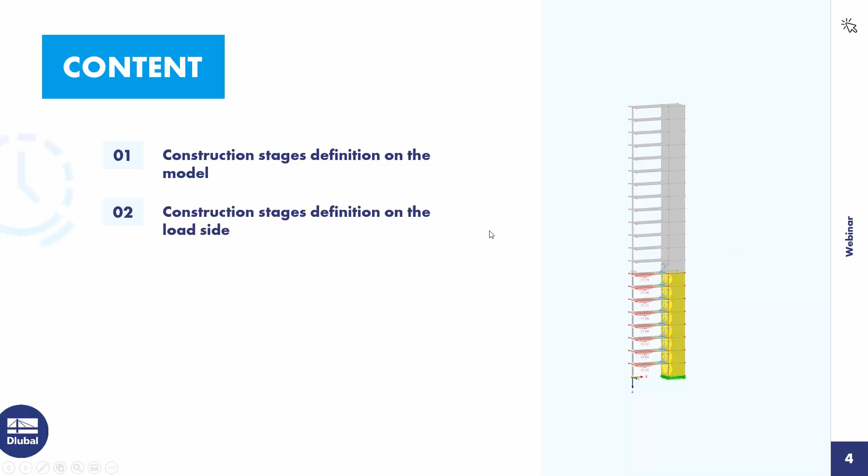You can email questions to info@dlubal.com. For today's agenda: first Adrian will define the construction stages on the model, then in the second step on the load side, the third point of the webinar is design based on construction stages, and the fourth point is review of results and documentation.

After the presentation, he will also introduce some new features in the add-on.

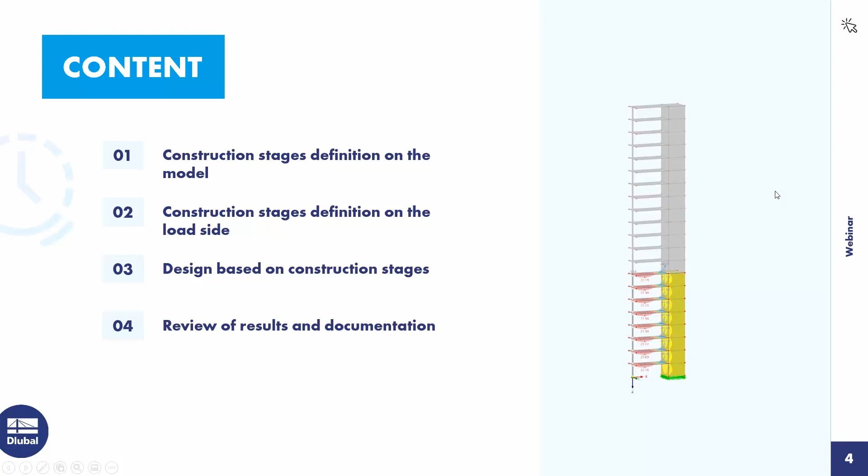Then let's go, Adrian. So you should see my screen now. First of all, a short introduction of the main example I want to show today.

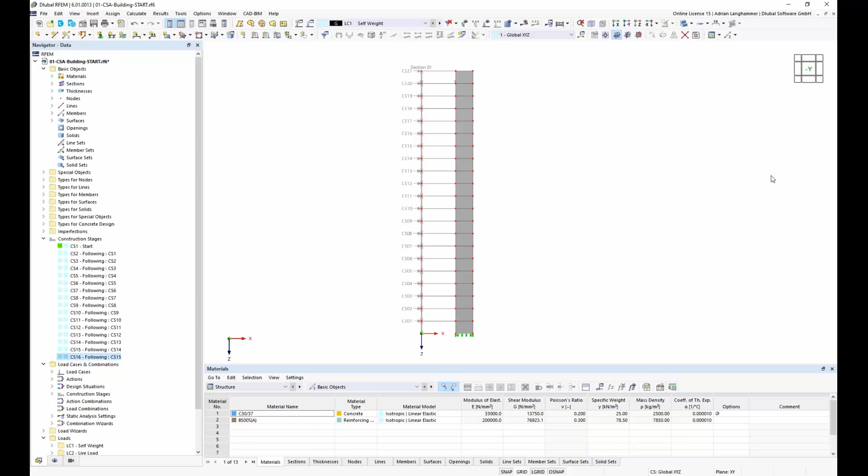This example is based on a literature example from the German book Finite Elemente in der Baustatikpraxis by Rustler and Barth, which is in turn also based on another example from Bischoff and Plätzinger. I did not use the whole structure of the literature example, only a substructure to show the effects regarding construction stages.

The structure, as you see, is already modeled. A short description of the structure: there is a shear core with concrete walls with a thickness of 40 centimeters, and there are also slabs.

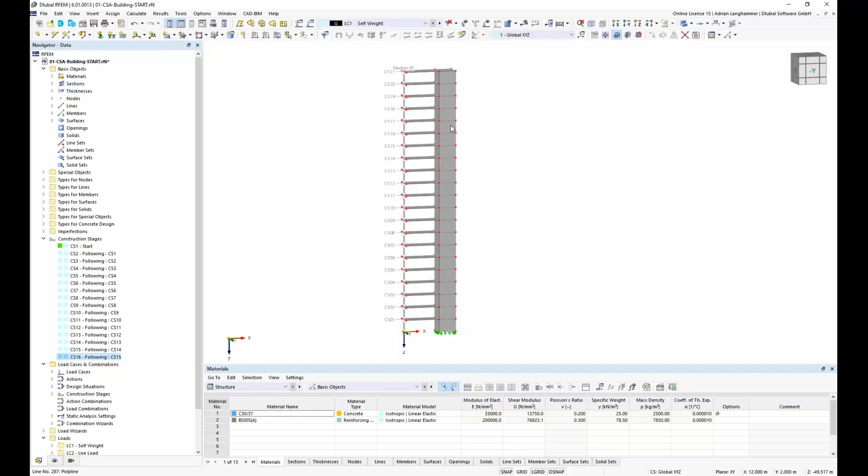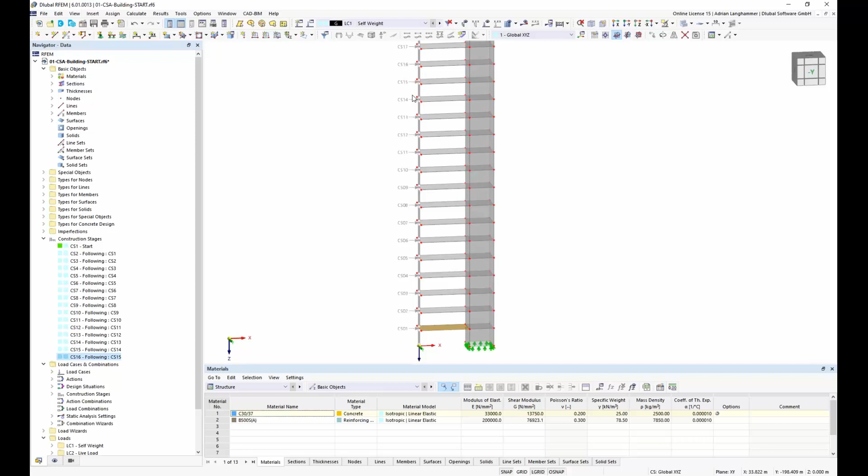Here I can show this as well. There are slabs with a thickness of 20 centimeters, and there are quite slender columns here with a square cross section 20 centimeters aside. First, before I start with the construction stages, I will calculate the internal forces and the deflection of the whole structure.

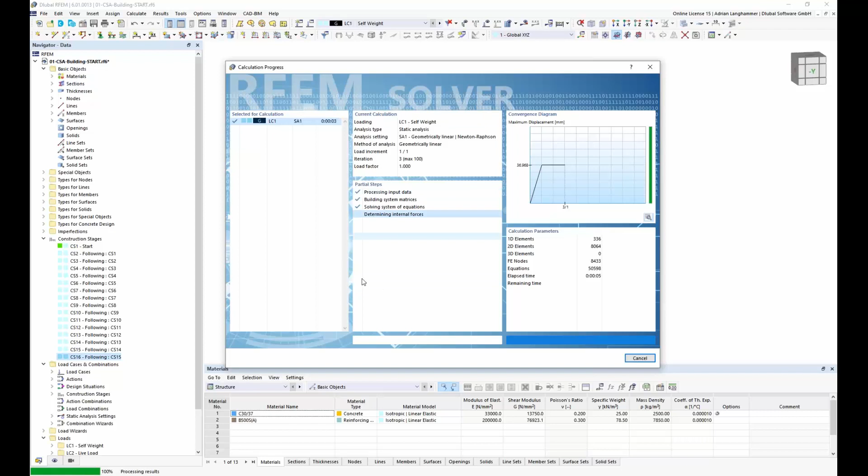I will calculate with self-weight without considering the construction stages, to show what the topic is in this example, what the problem is in this example.

If we take a look at the deflections, we see that the slabs here hang on the inner core. And if we take a look at the internal forces, bending moments in the surface, we see—I have here a section in the middle—

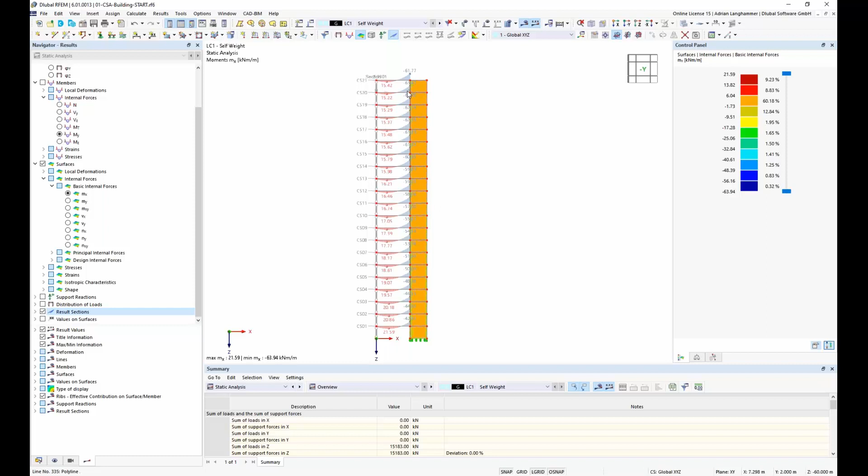As we get higher, the moment about the support is increasing and the moment in the field is decreasing. This effect appears due to the different stiffness distribution in the structure and due to the effect that the slabs hang on the core.

And in reality, you do not build the whole structure in one step. You build it in single stories, and the weight is applied not in one moment but step by step. To consider this, we can use the construction stages, and of course avoid such topics like we see here, that the moments are maybe not correct in the highest story.

So I will show the input for the construction stages. First of all, you will find the construction stages add-on here in the base data, where you find all the other add-ons.

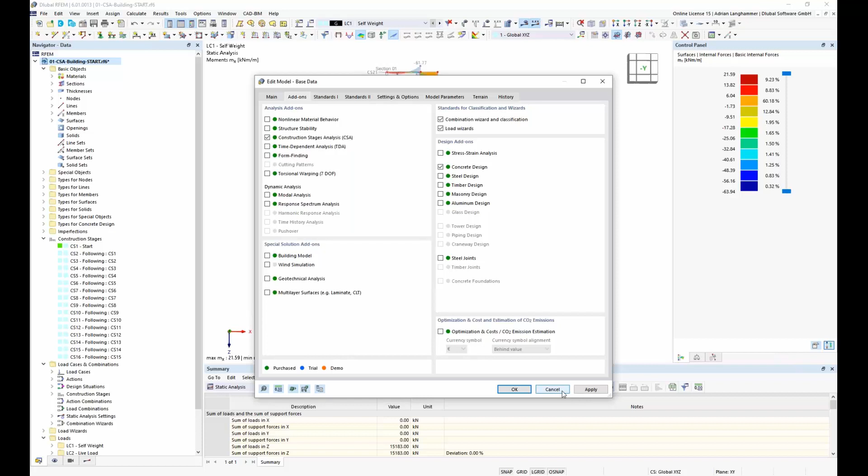Here on the left side, construction stages analysis, or short CSA, and I already activated the add-on. The input is done here in the navigator in two parts. There is one part on the structure side to define the stages on the structure side, and the other part is definition of the stages on the load side. So we will start with the construction side.

I already defined some stages. If there's no stage defined, you can start here with right-click New Construction Stage. I defined them already because the input for the stories is quite similar for the whole structure, so I don't want to waste time. Therefore I defined already some of the stages.

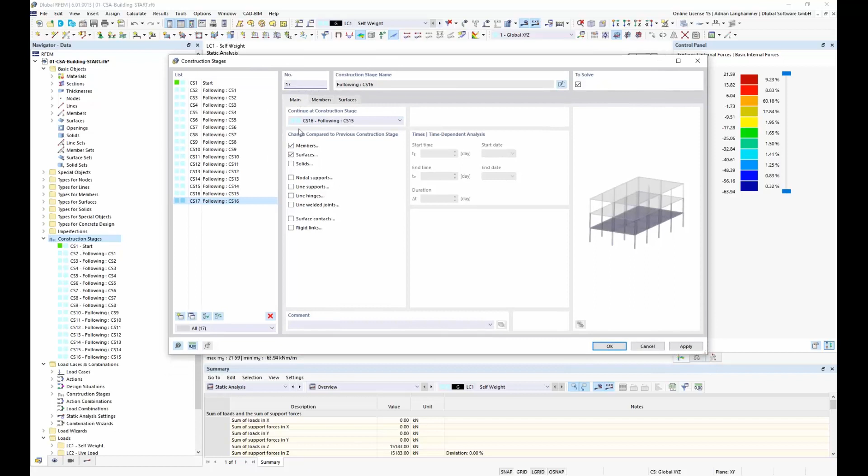For the input of the construction stages, you have here in the first register the parts or the structural elements which could be used in the construction stages. If you want to use one of the structural elements like members or surfaces, you have to check here, and then you will get an additional register where you have to do the input, or where you have to choose the members or surfaces which should be activated in the particular stage.

There's another part here on the right side, an input regarding the time-dependent analysis. This is another add-on which is at the moment not ready, it is still under development. In the future, there will be the possibility to consider also the time-dependent analysis together with the construction stages. But as I said, it is at the moment still under development.

I guess when it is ready, we will have an additional webinar regarding this topic, so we will show then especially the time-dependent analysis. Today, there's only the calculation of the internal forces considering the construction stages.

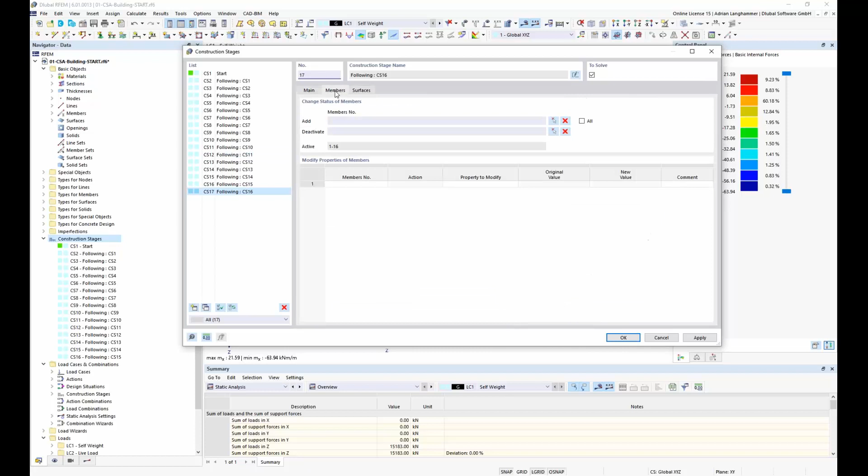After I've checked here the members and the surfaces for this construction stages, I have to choose which member, first which member and then which surface should be applied in the stage. So I will start with the member. As I said, I already did some input. Where if there is once a column or a member selected in the stages before, I could not select it again. You see this. So I will choose the following members and surfaces.

Maybe I can turn off the results from the linear, from the load case 1. I have to select the surfaces. In the whole construction stages there are 21. I can now define the following stages till the end and go through the input.

It remembers the input from the stage before, so here it is activated again, members and surfaces, and I will add the last columns here. I can add it by picking them, or I can also add here the columns numerically. They have here in this example the same number as the construction stage, so I know the number of the columns.

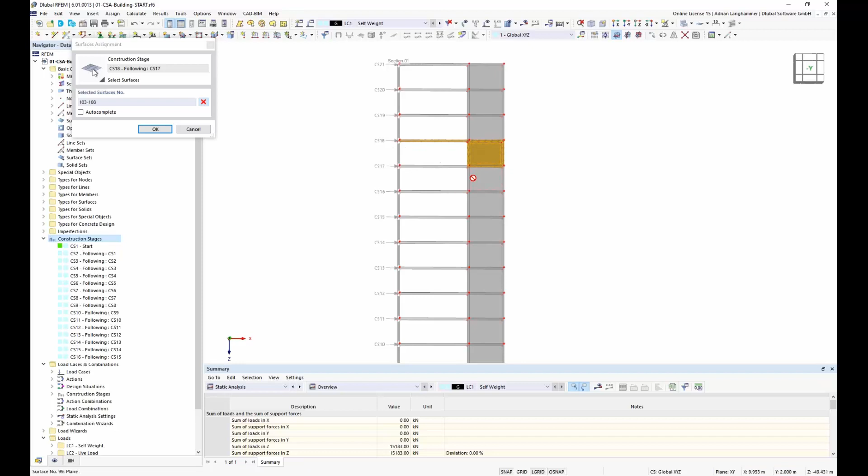For the surfaces, I have to do also the input. It's the same like for the columns, if I select surfaces, it can only apply the surfaces which are not used in the stages before. And I will here finish with the input.

I made some short comments here so that I know in which construction stage the elements should be used. And then I'm ready with the definition.

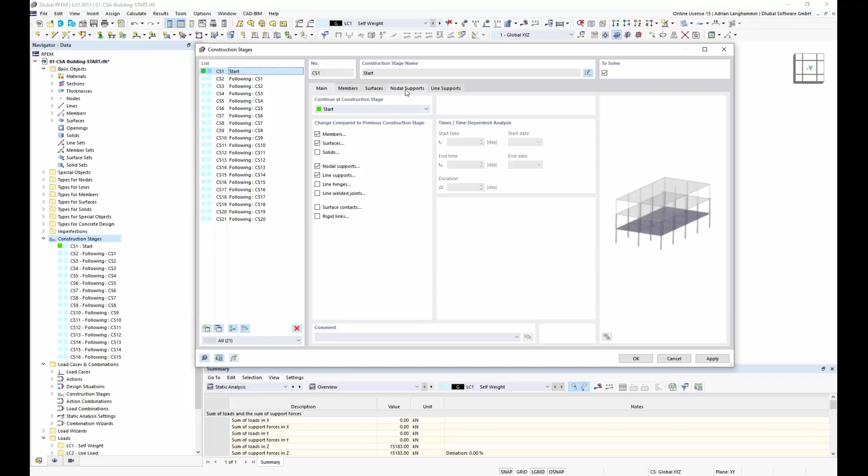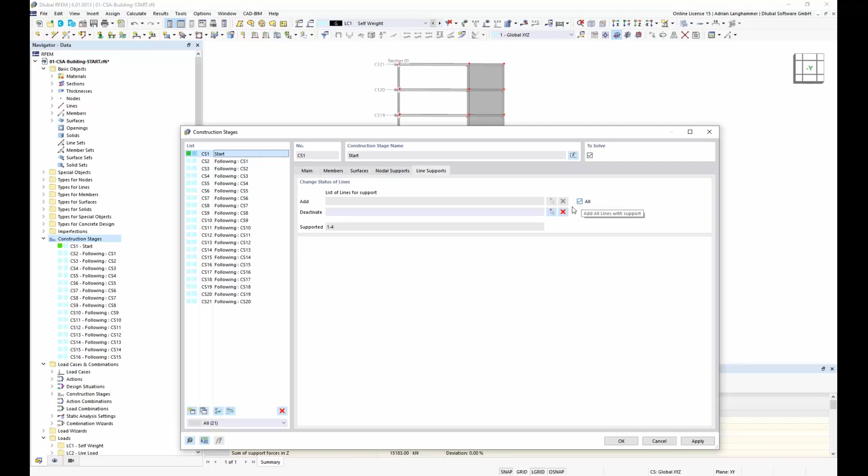In the first stage, maybe I'm not sure if I already did it. Yeah, I did it, I already chose it. Of course, in the first construction stage, I activated additional nodal supports and line supports. And of course, there's only one nodal support at the bottom of the first column. So I can here use also all, or I define, or I select only this single nodal support, and here it's the same for line supports. I selected to use all supports in the first construction stage.

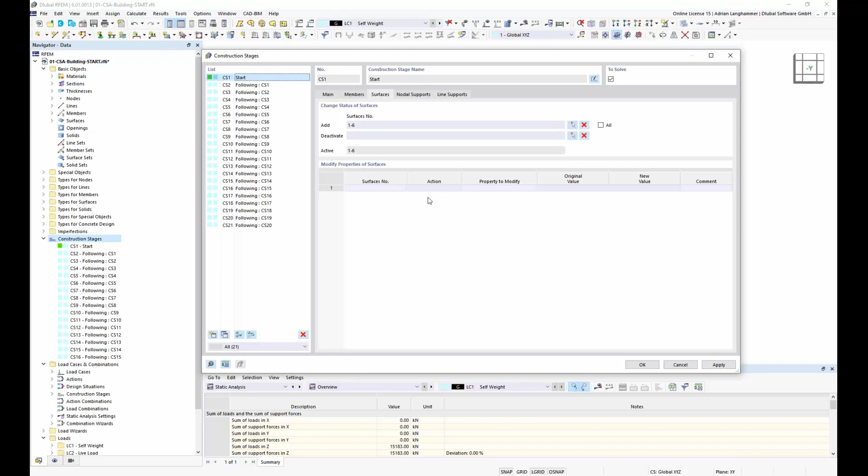Later, I also will show a small example regarding modifying properties during the stages. In this example, the elements are only added, and once they were added, they will not be modified anymore. But then at the end of the webinar, I will show a small example where I have to modify the elements during the construction stage.

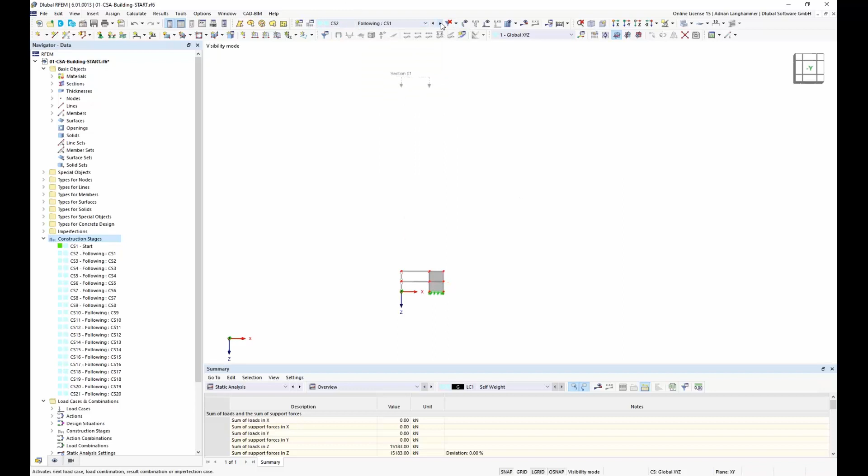So this should be the input of the construction stages. After I did the input, I see here also in this drop-down the single construction stages, and I can go through and maybe check graphically if everything was defined correctly. Later there will also be the results here available in this menu.

Now I will define the construction stages on the load side. So we have on one side the structure, and on the other side the loads.

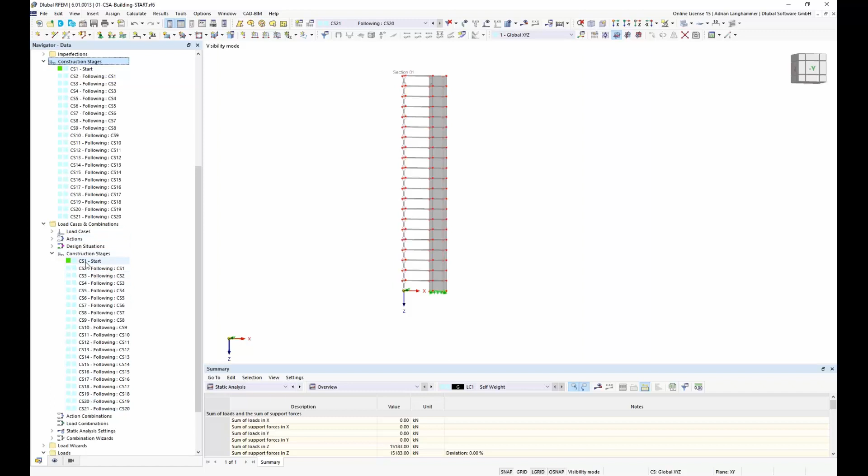If I've defined the construction stages here, they are automatically generated in the load cases and combinations. So I can, for example, edit a construction stage, and here I have to choose settings regarding the calculation and also do the input for the used load cases.

First of all, here is the type of calculation. There is the stages analysis based on load combinations - this is, let's say, a nonlinear calculation.

And there's another method, the stages calculation based on result combinations. This is a linear calculation which uses linear superposition and some special algorithms, but this function is also at the moment under development - I guess it will be available soon.

Now at the moment we have only, it doesn't have to be only, it is the more specific method, the nonlinear calculation based on load combinations.

I use here geometrically linear analysis, and I have also some additional registers where I have to choose the load cases which should be applied in the construction stage.

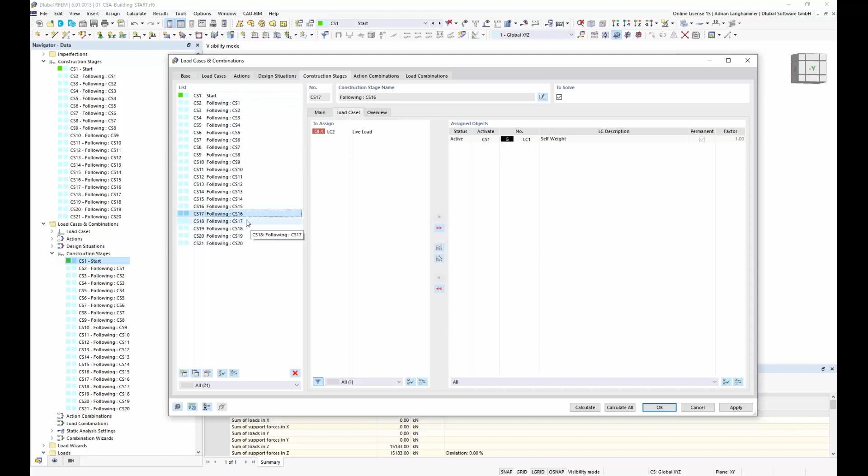And after the construction is finished, and it could be normal use, I can add the live load. Of course, this is a bit a simplified structure - in reality you will probably also have in the finished state other live loads, and snow and wind loads like this. Here it is a bit simplified.

I only have one live load here for the last construction stage, which I will apply in construction stage 21. And the program knows that it is a non-permanent load, a live load, and it considers this live load as non-permanent.

The next register is an overview regarding the combinations, the generated or defined combinations. At the moment we did not define some combinations, so this is empty, and you will see the elements here after the combinations are generated.

Back to the main register - now the topic is, we have defined the loads for the construction stages, and now we have to choose if we want to generate the combinatorics or combinations. This is possible if you use this option to create the combinations according to the combination wizard.

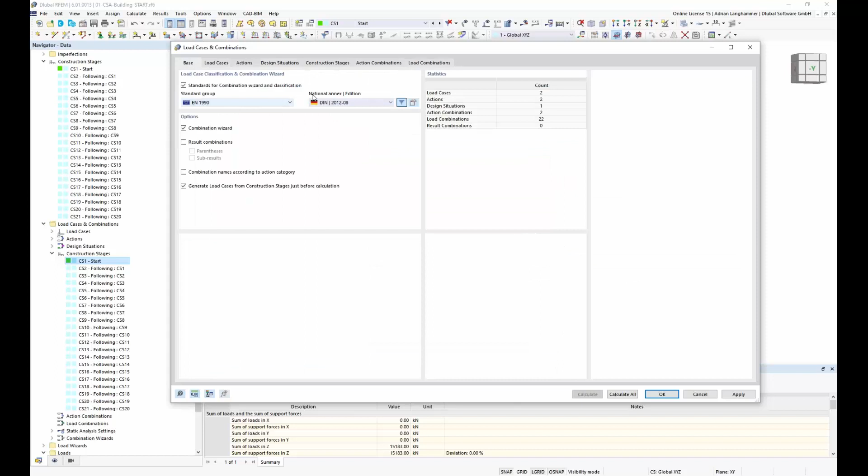This is the automatic combination. Of course, there's also the possibility, maybe I forgot to show, here are the settings in the base, the settings for the automatic combination. I used it here according to Eurocode with German annex. There are also other standards available, but here in the example I used Eurocode with German annex.

Of course, there's also the possibility, if you do not want to use the automatic combinations, you could define combinations manually. I will show this as an alternative. So I can create here a new load combination. Maybe I say it is user-defined. And I can maybe say it should be a user-defined combination based on construction stage 10, somewhere in the middle of the building process. But it's just to show how the input works.

Then if I have defined it, I have to choose the analysis type. I choose the same as for the construction stages. And then here in the special options, for the automatic combination it is filled automatically. Here I have to define the special options, which are the construction stage which should be considered. So this is, for example, construction stage number 10. And I have to choose the previous stage, so the initial state of construction stage 10. This is construction stage 9 here.

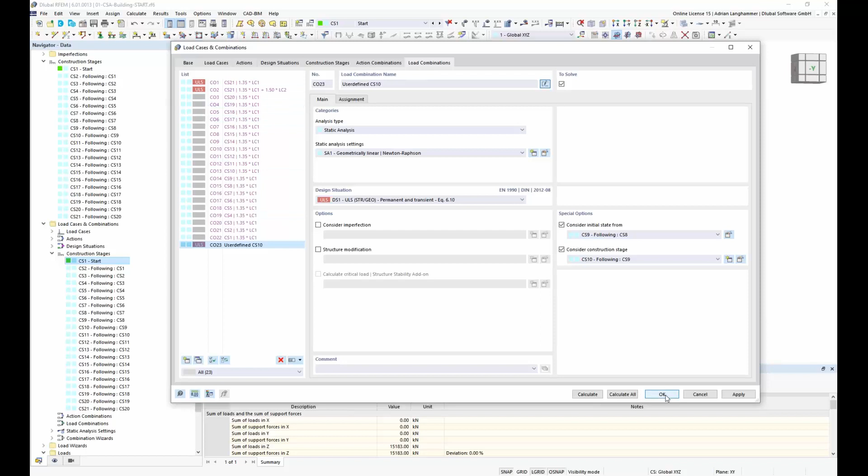Now I'm ready with the definition of the load combinations, and I could check here with OK, and I could start the calculation. Maybe first the combination 2 for the finished construction. And so this is with live load. There's also combination 1 only for the dead load.

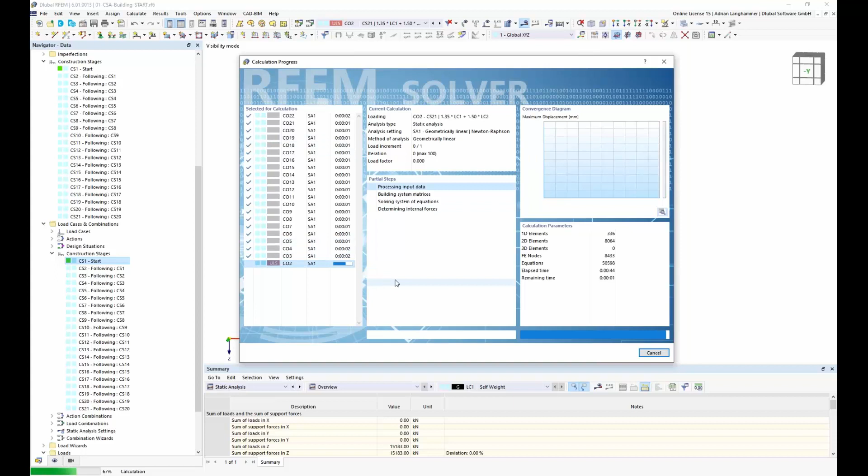Here we see, normally if you use RFEM without the construction stages, it is possible to calculate the internal forces or the deformations with multi-threading, so it could use more processes. Here, because the construction stages need the result of the stage before, it is only possible to calculate it step by step. And after this is ready, we can have a look at the results.

Maybe we take a look at the results without live load, to compare the internal forces with load case 1, which we saw in the beginning. So now, if we consider construction stages, we see that there's another distribution of the internal forces. The field moment in the beginning and the end is quite similar. Also the moment above the support.

And this should be the realistic distribution of the internal forces if we consider that the deformations in the columns are balanced during the building process, and that the load is not applied in only one step.

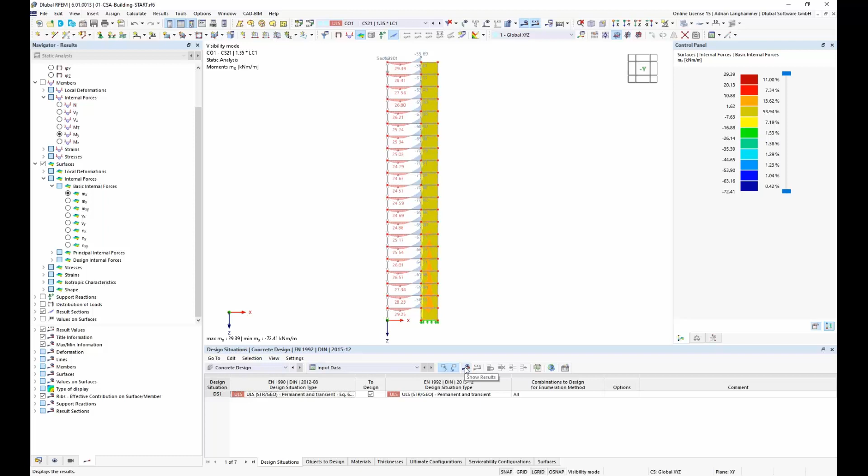So after we have the internal forces, we can go on with the design. I will here show only as an example the concrete design, only to show the philosophy. It doesn't matter if it is concrete design or steel or timber design. I only want to show how the design in combination with the construction stages works. So I go here to concrete design. I already prepared the input, and I can now calculate the concrete design for the ultimate limit state. I have to start the calculation here.

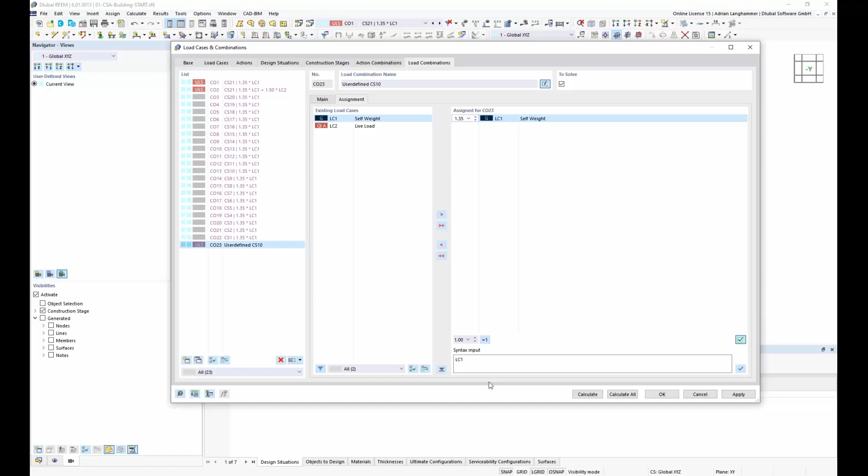Oh, that's a good hint. I forgot something. While defining my user-defined load combination, I completely forgot to assign a load case, because it is a user-defined combination, and of course I also have to choose the load case which should be considered. This is something I completely forgot, but that's not a problem. And now the calculation should be possible. It should only influence this one user-defined combination.

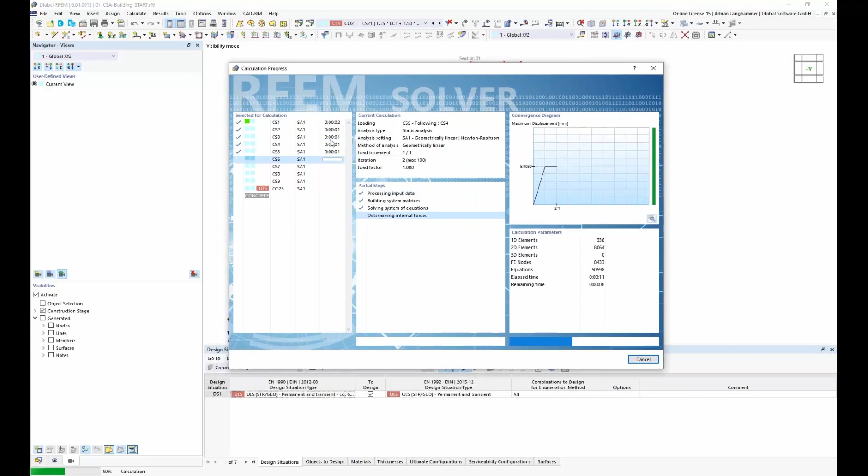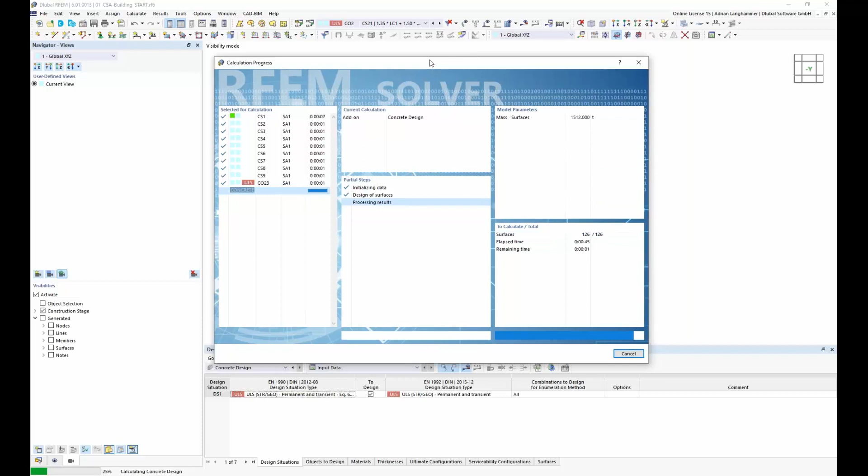And after the calculation of the internal forces and the concrete design is ready, I will show how the construction stages are considered in the results for the concrete design. It should be ready soon. I guess it's already preparing the results. And now it should be ready.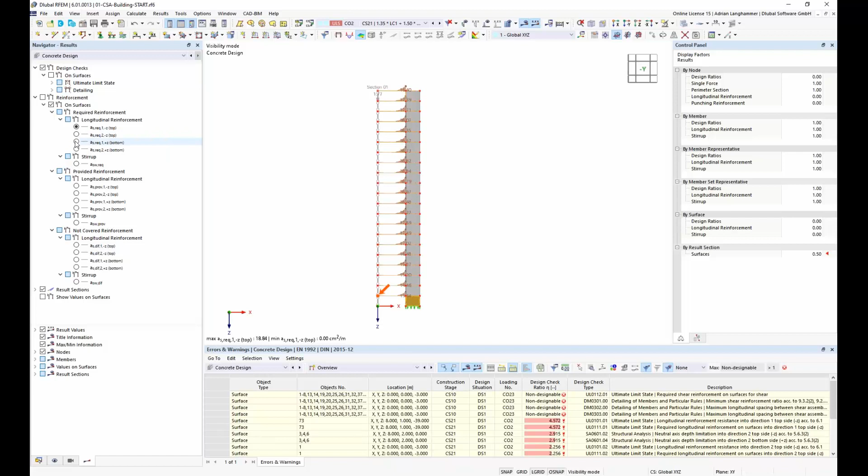And then we see here, I prepared it. I don't want to show all the single design checks now. I only want to show as an example the required reinforcement in the same sections which I used for the internal forces. So the required reinforcement at the top and at the bottom side for the section.

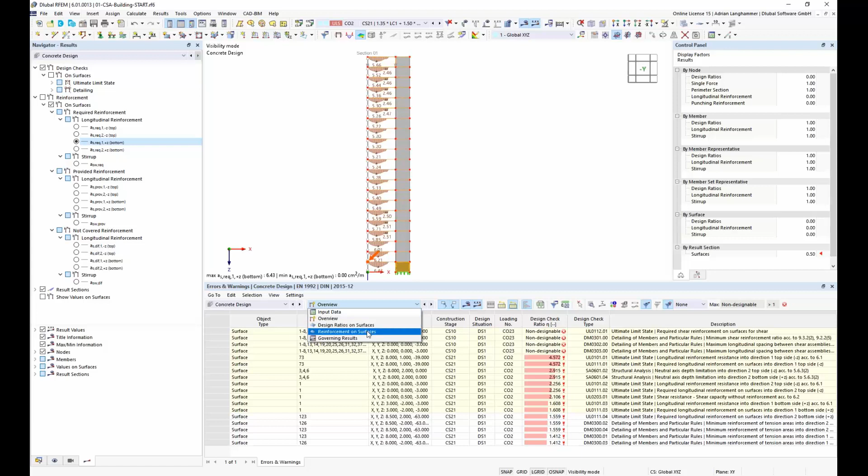I see here in the graphics. Regarding the construction stages, I see the results of the construction stages once in the tables for the results. So here in the tables for the required reinforcement, I have the construction stage 10 and the construction stage 21. These are the construction stages where I defined a load combination. Here for construction stage 10, the user-defined combination 23, and for construction stage 21, the automatically generated combination 2.

I also can select different tables here, and the construction stages are also considered in these tables, but this is a special topic regarding the design. I only want to show the principle of considering the construction stages. If I want to take a look at the graphical results of the construction stage, I can choose the construction stage here, and if concrete design is chosen, then I see the results for the concrete design for construction stage 21.

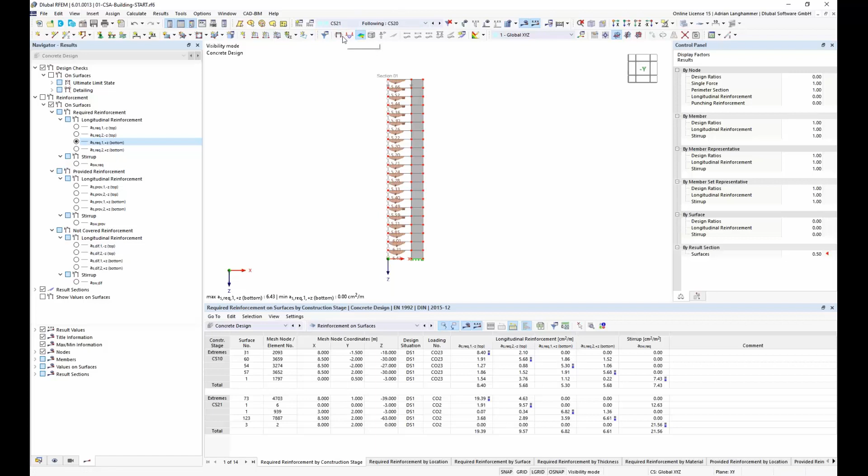If I switch, for example, to statical analysis, I would see the internal forces of this construction stage 21. And here I also can switch to construction stage 10 with the user-defined combination, and then I see the results of the design for this construction stage 10. If I have a construction stage where I did not apply or generate any combination, then I see nothing for the concrete design. Then it's empty, of course. Yeah, this is only a short overview of how the construction stages are considered in combination with the design.

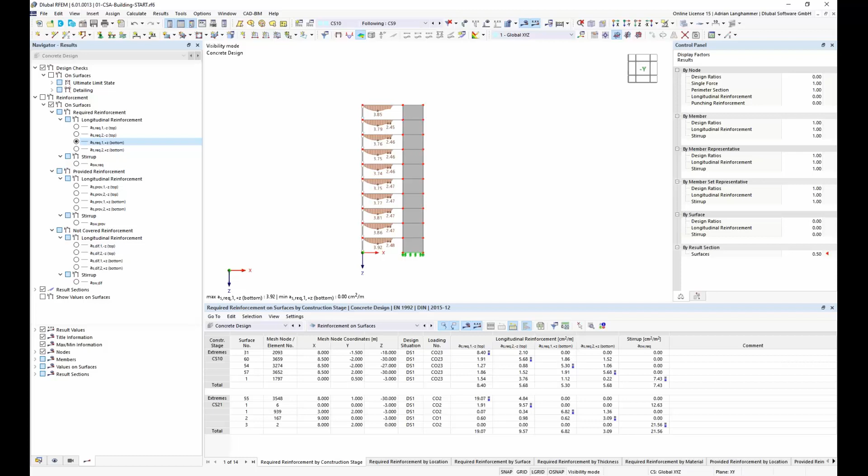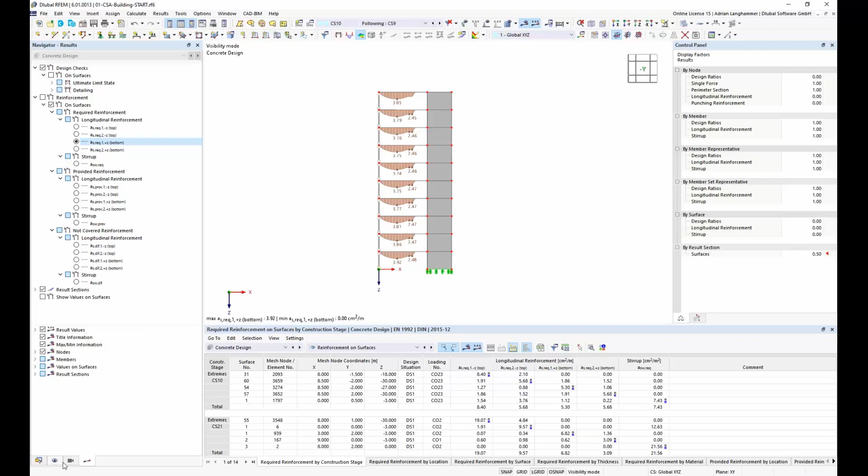The next step would be the documentation or the printout report. I also only want to give a short overview of how the construction stages could be considered at the moment for the documentation. So I have different possibilities. I want to show two, how I could print graphics of the construction stages into the printout report. I already generated a simple printout report without graphics, only some automatically generated tables for the construction stage. And now I want to print graphics to the printout report.

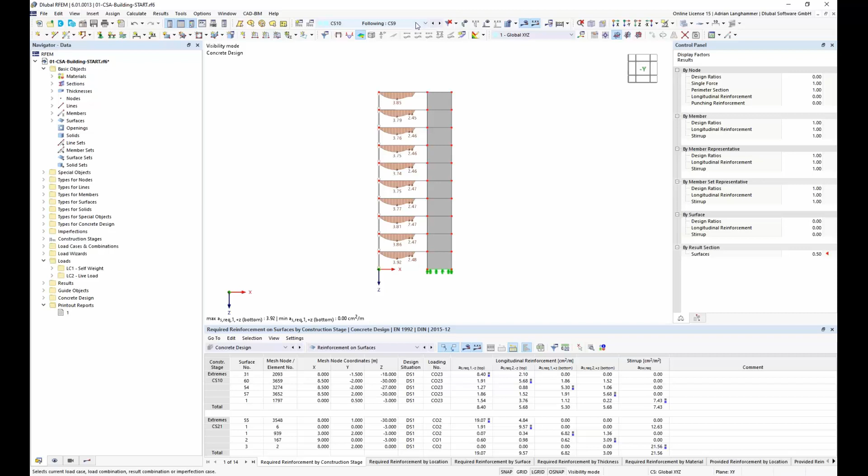The first possibility would be to generate different windows and then print different windows at the same time to the printout report. Here I generate 4 windows, and I will show them tiled vertically. I also have to adapt the view. I choose the same view here for all the stages, and here I can switch to the construction stages. Then prepare the screen for printing. I also could select it by clicking here. So I have 4 windows with my defined graphics.

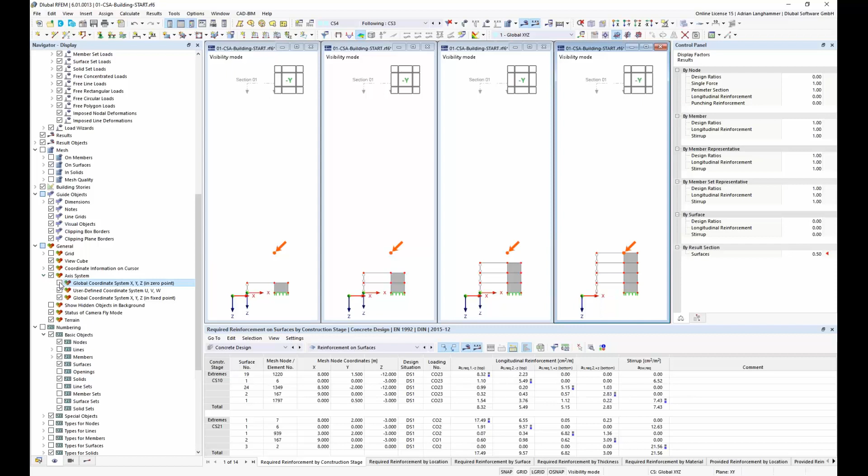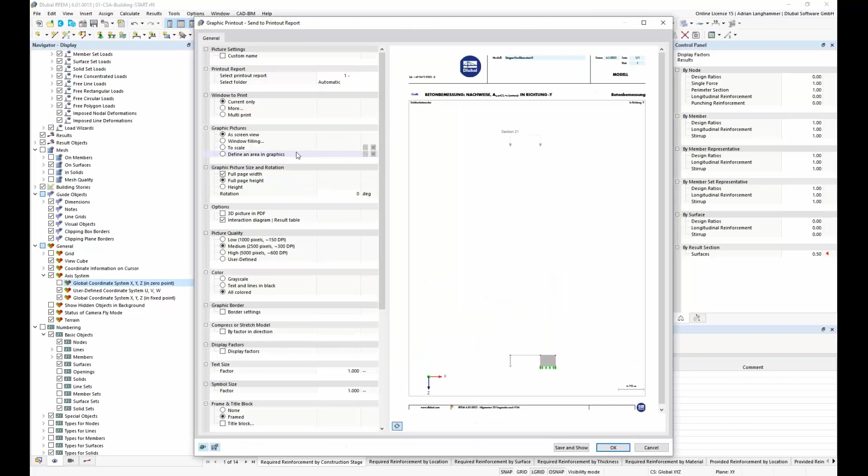I maybe can turn off one of the axes, let's say this one. I forgot it before I defined the windows. And then the graphics are ready for printing to the printout report. So I can choose print graphics to printout report here. And then I get this preview of the images. At the moment, there's current picture only, but I want to use more windows in one print, so I can choose more here, and maybe I can switch to not as screen view. I can choose window filling to see the structure a bit larger, and then the graphics should be prepared.

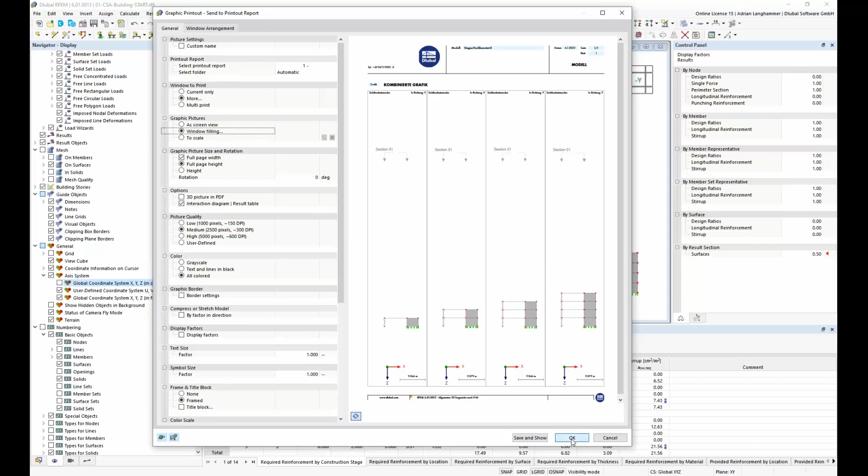And yeah, this would be one possibility how to consider the construction stages for printing the graphics to the printout report. Okay, the graphics are printed in the printout report. I see it here, and this is the first possibility.

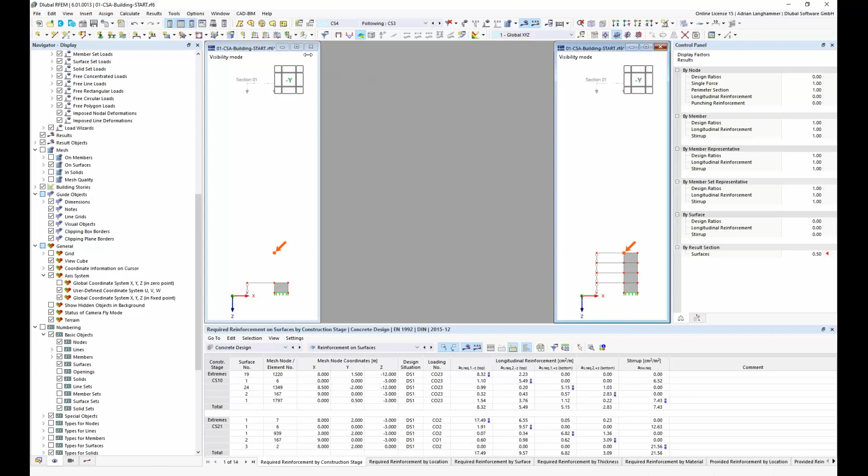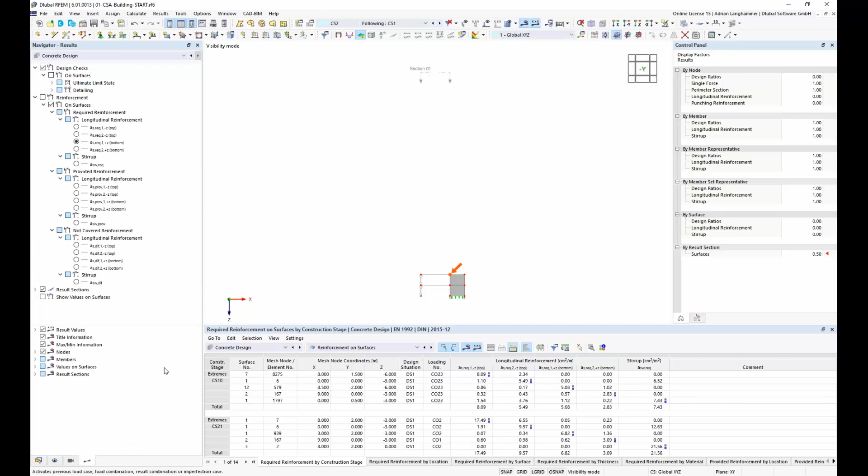The second possibility would be the multi-print function. To use it, I have to close these additional windows and go back to only one window. At the moment, there is no special filter in the multi-print for considering the construction stages. This will be released soon. At the moment, I have to create the views manually, so I can switch between the stages here and generate the views. So I will show it, for example, for the first 3 construction stages.

I can here create 3 user-defined views, and then use the multi-print function related to the user-defined views. In the future, there will be some kind of an automatic way for using the created stages directly for printing, but here at the moment I have to do it manually.

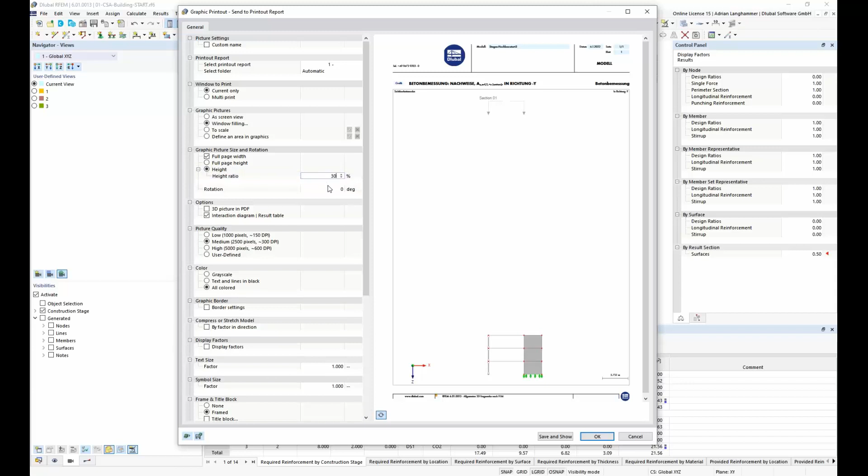I will go back to the preview function, and now I can prepare my graphic first before I use the multi-print function. I want to print more than one picture per site, so I can here say the complete height is not used. I use maybe only 30%, and then, because it's better for the fitment, I can rotate it 90 degrees. And then I have it defined for one picture, and now I can use the multi-print and choose in the next register which views should be used for the multi-print function.

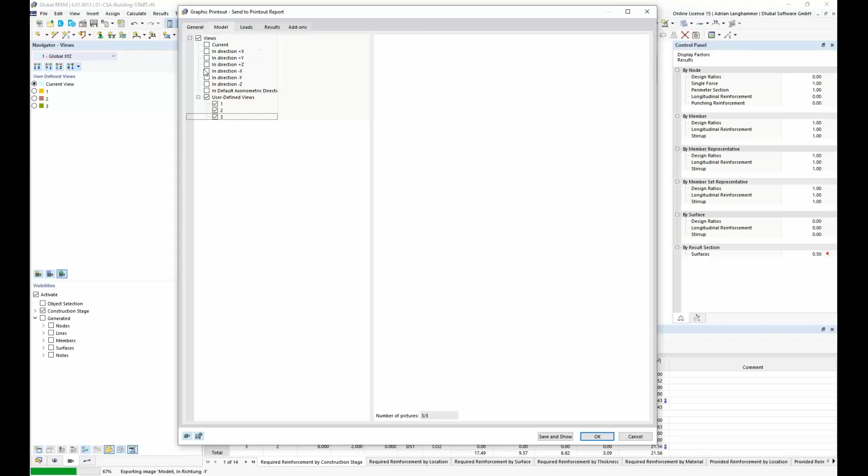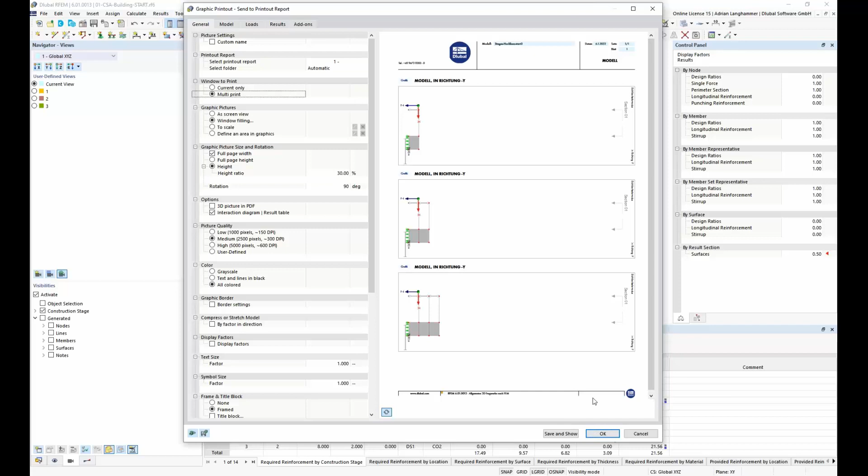And here in the future you will find some additional settings regarding stages where you could use automatically generated views. So this was the second possibility how printing the construction stages is possible. So this should be the part regarding the documentation.

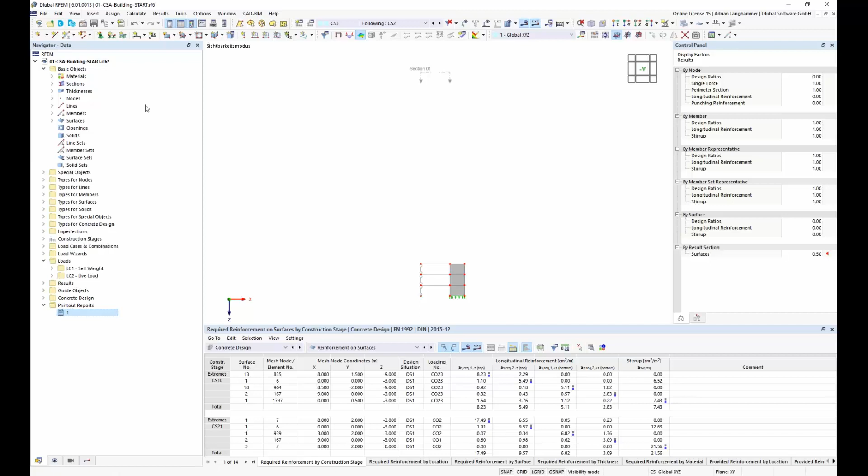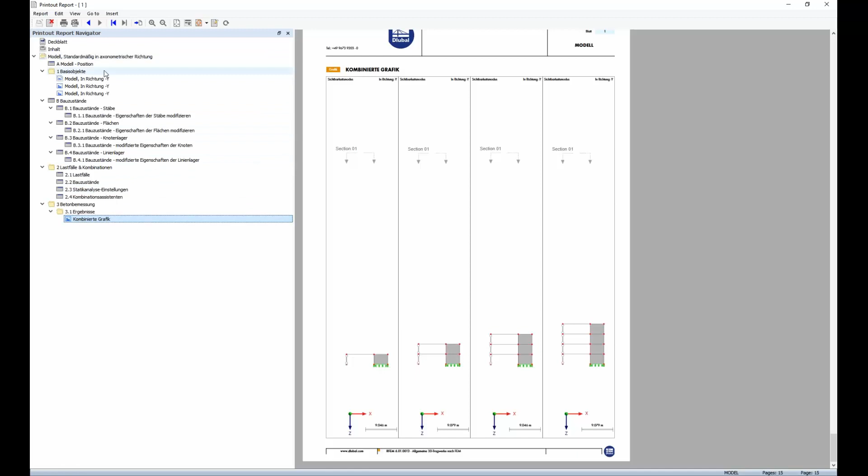The next part, maybe I can show the printout report. There should be the graphics now. Yeah, there's one. Oh, maybe I have to start with a new page here if I want to use them all on one page, and here above is the combined graphic. I just recognized I forgot to change the language in the printout report to English, but you see how the graphics would look like. Doesn't matter which language is used. This would be the big example. I now want to show some smaller examples or features regarding the construction stages.

One feature, and this is quite new compared to RFEM 5, is the possibility to combine the construction stages with other add-ons or other types of analysis. So, for example, I could combine the construction stages analysis with the stability analysis. And here is maybe some practical example.

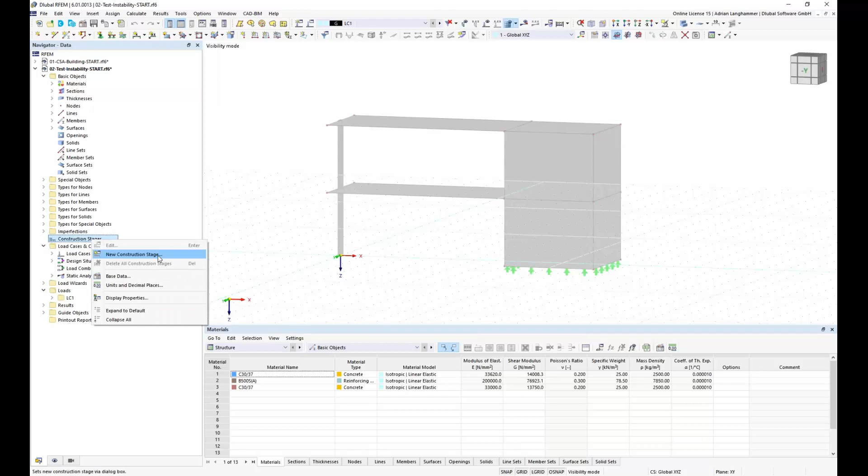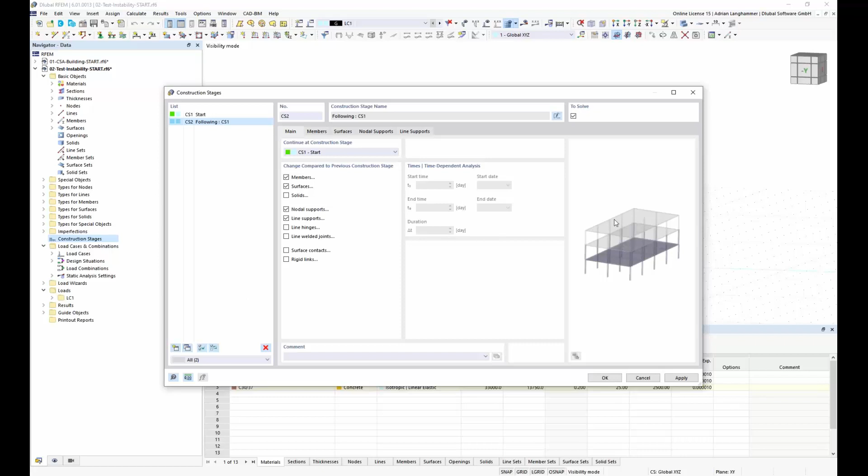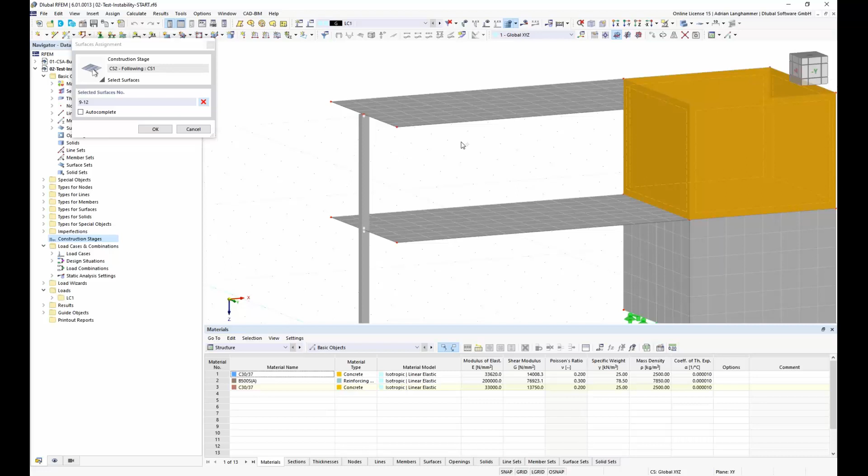So imagine I have here only the first 2 stages of our example, I define them as I did before in the bigger example. I have the nodal supports in the first stage and line supports. But this time maybe I do something wrong in the input, and I will choose here for the second stage the column, but I will forget the slab. So if I want to calculate construction stage 2, there will be an instability due to this column, which is hinged at the beginning and at the end, and then could freely move if there is no slab here or no support at the top.

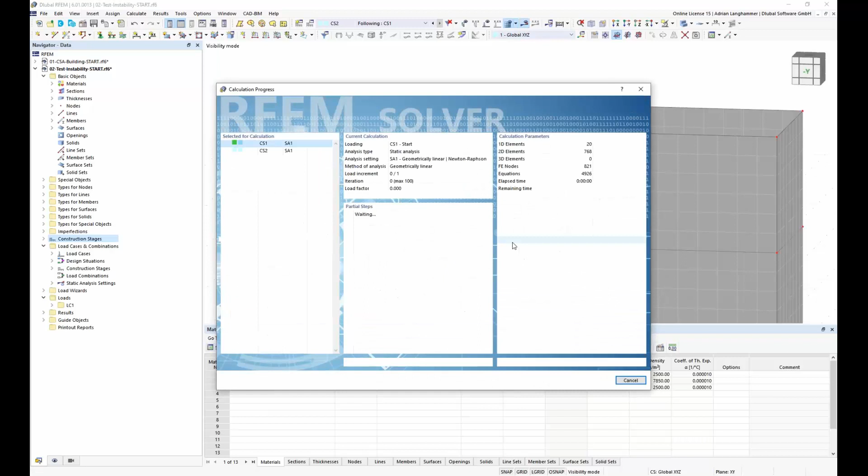So I define the stage without the slab, and I will probably get instability in construction stage 2. In this example the reason for the instability is quite obvious, but you will probably have some situations in reality where it is not so obvious, and then you could combine the construction stages with another analysis, here with the structure stability.

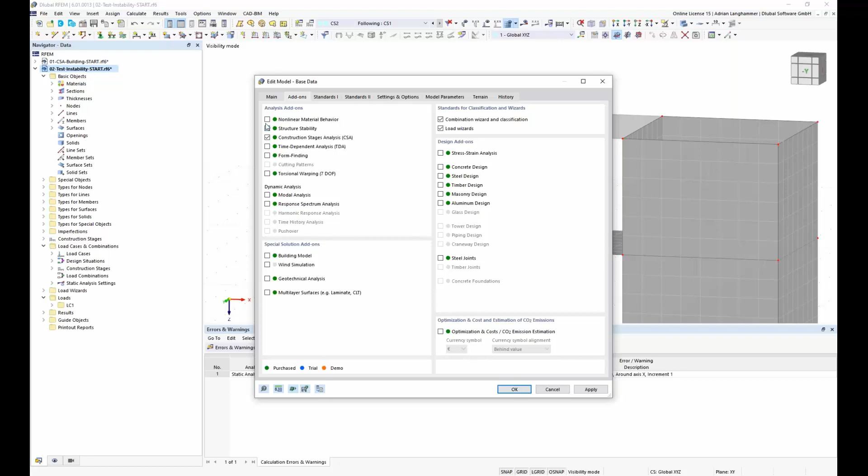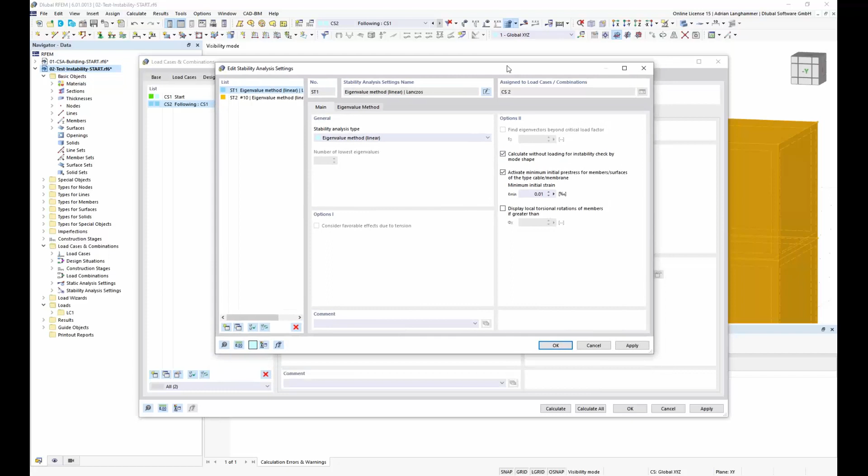So I will activate also the Structure Stability add-on, and then I will open construction stage 2 again, and then I can use for construction stage 2 the stability analysis. And here I do not use the normal eigenvalue method. I use a special method which is able to find the eigenshape for the unstable structure. This is this function here. So the stability analysis is able to calculate the mode shape for the situation where the structure is not stable. So I will do the input and calculate again.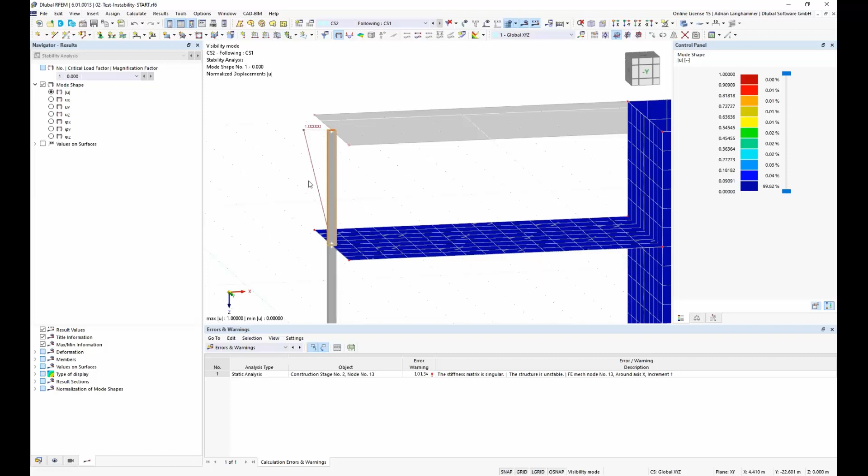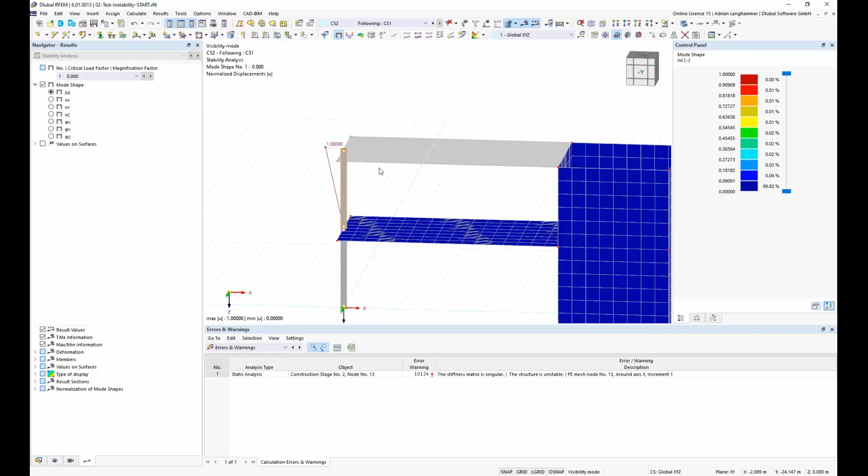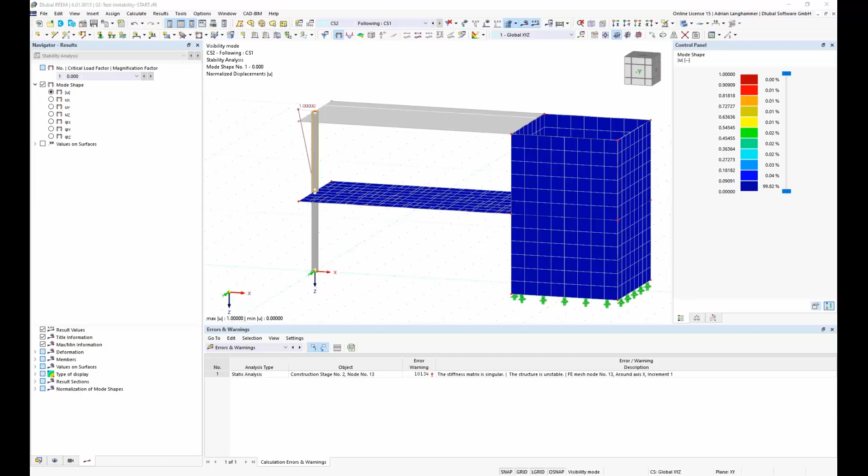So this is one example where it's also useful to combine the construction stage analysis with some other add-on or other kind of analysis. For example, you could also use dynamic analysis or something like this. It's possible to calculate all add-ons with construction stages. This as one small example. There is also another small example. As I said in the beginning, there's also the possibility to modify structural elements in the construction stages. So there's not only the possibility to activate and deactivate elements, there's also the possibility to modify them.

Here's an example where this function could be helpful. So I have here prepared an example. The construction stages are already defined for four different construction stages. And in the last two construction stages, in one step the steel girders are applied, and in the next one the concrete slab above.

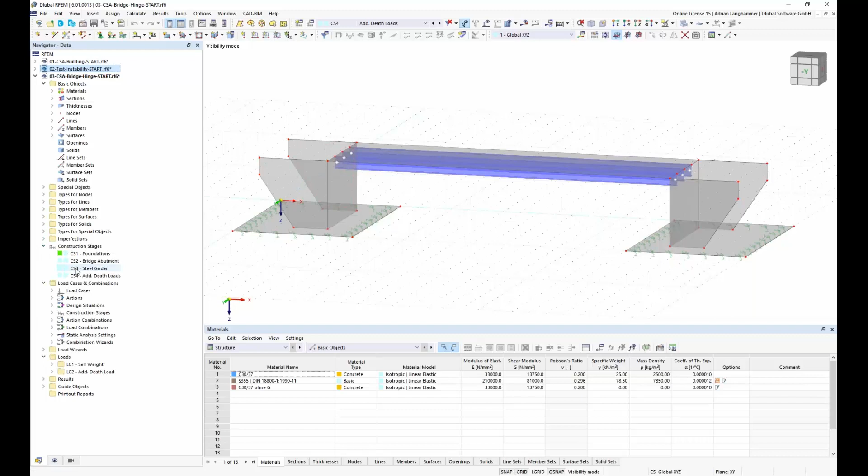And while activating the concrete slab in the last construction stage, I would also like to change the connection of the steel girders, so they should change in the last construction stage from hinged to rigid, because you have concrete over these steel girders, and the connection will be rigid. So to do this, I open the last construction stage,

and I go to the register members, and then I choose here the 3 members to modify their properties. So here I can choose I want to modify them, and here I could choose which property I want to modify, and I say I want to change the hinge at the member start. The add-on knows the original value of the hinge, and I want to change it from hinged to rigid, so the new value should be no hinge anymore.

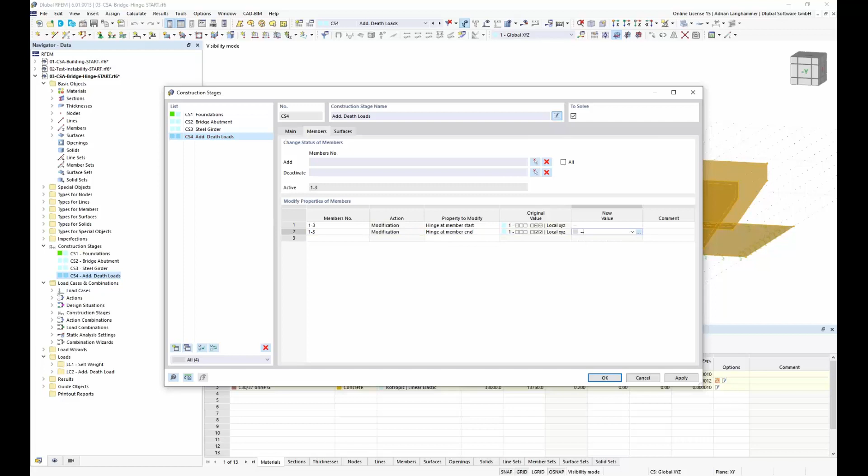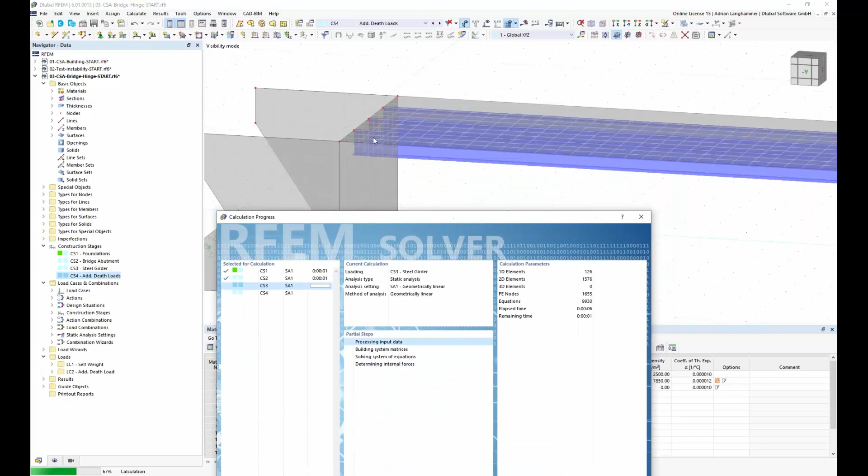And the same for the hinge at the member end. And then I could calculate. First I see here that something has changed. The hinges are not shown anymore for the last construction stage, and I could start the calculation of the construction stages, and I should see in the last construction stage, for the load which is applied in the last construction stage, a moment above the support here.

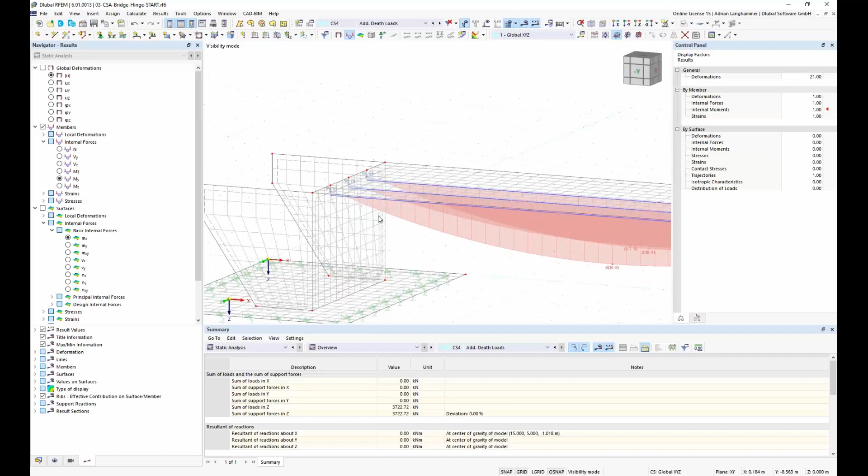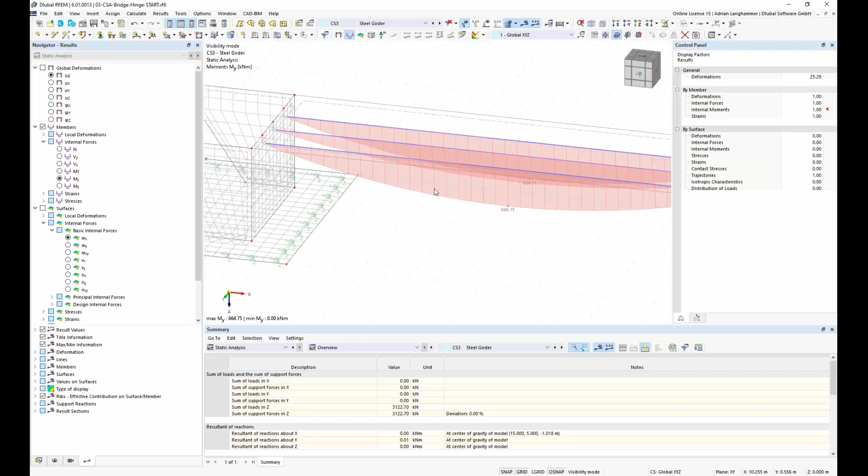We change to the wireframe model. Here I see for the new applied load in this construction stage, there will be caused a moment above support. For the loads which were applied until construction stage 3, I have this connection considered as hinged. So this is maybe also a small example how to modify properties in the construction stages analysis.

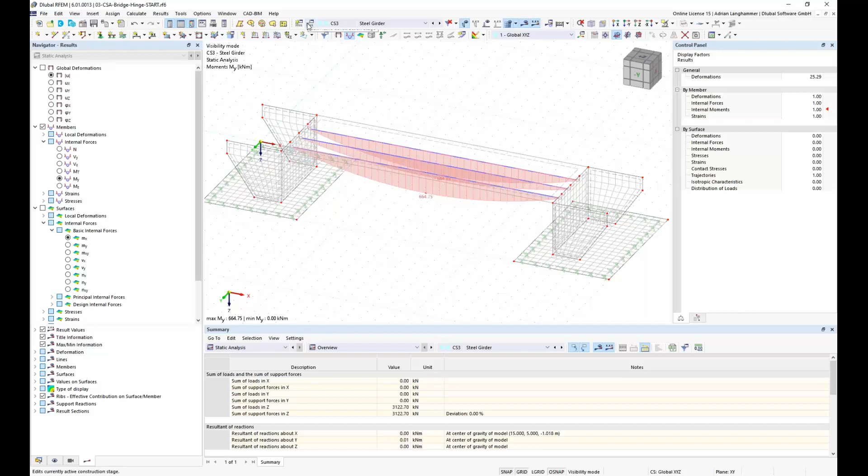This should be all for the examples. At the end I will summarize some new features compared to RFEM 5, where we had the add-on RF-STAGES, and compared to RFEM 5 we now have some new and quite important features. It is now, for example, possible to calculate construction stages without adding a new load, so I don't have to add a load case in every single construction stage. Here only the permanent load is considered. It is enough to change the structure side. This was not possible in RFEM 5.

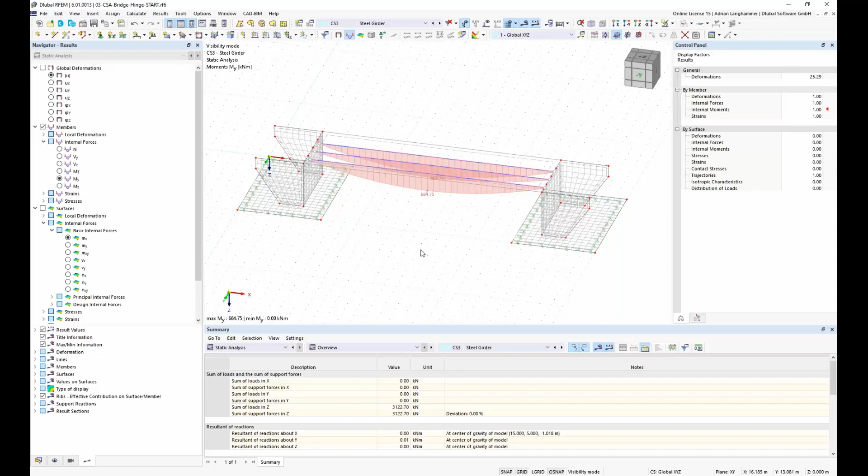It is also now possible to reactivate elements. This could be useful, for example, if you want to simulate renewal of a structure where you remove old parts and add new parts at the same place. This was also not possible in RFEM 5. As we saw in the main example, it is possible to use the automatic combinatorics of RFEM in combination with the construction stages. This was also not possible in RFEM 5.

And in one of the last examples, the small example with the stability, we saw that it is possible to combine the construction stages analysis with other add-ons, or rather other types of analysis. This was also not possible in RFEM 5. So this is maybe at the end for summarizing the new features. So this is all from my side.